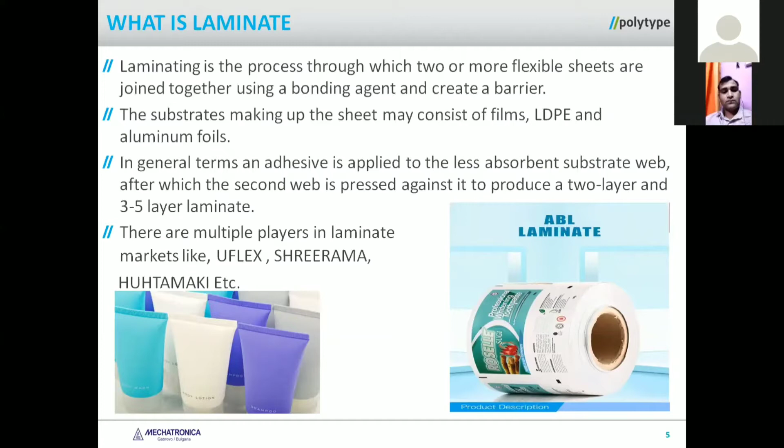As I mentioned, there are two types of laminate. One is ABL laminate, called aluminum barrier laminate, and the second is plastic barrier laminate. The ABL tube is mainly used for pharma, toothpaste, and shaving creams. Aluminum is the best barrier, so it preserves the product from light, oxygen, and moisture. This shows the basic composition of the laminate. ABL tubes give good collapsibility and a durable effect, desirable depending on the product required. ABL tubes are mainly used where barrier is required, like toothpaste, pharmaceutical, and FMCG.

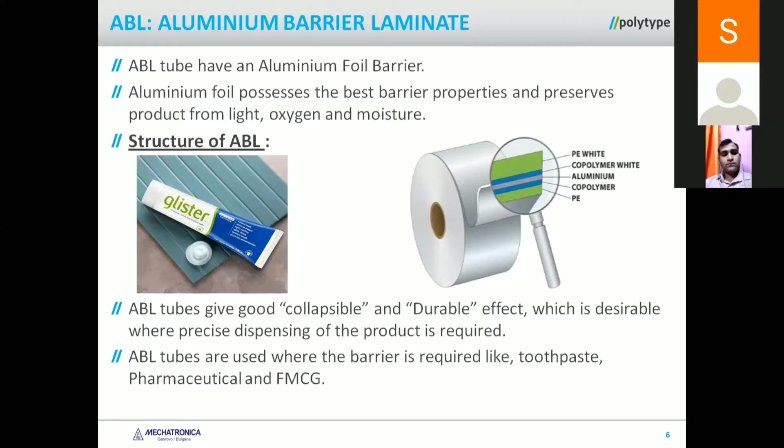The next one is plastic barrier laminate. If you see on this picture, instead of aluminum foil there's EVOH. This is another kind of barrier that gives barrier properties to the plastic laminate. This kind of packaging is more popular in the cosmetic segments like face wash and creams, and it is very environment friendly.

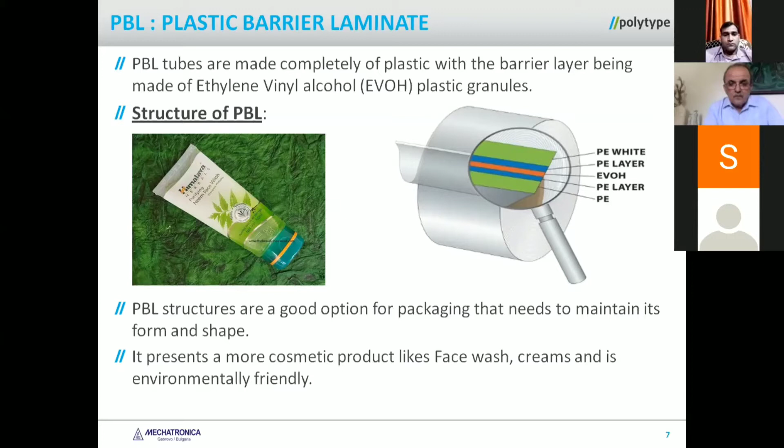Next. If you see this basic process, ultimately this process you're going to see at the end when the video takes you to the factory. But the basic process is: first you have a laminate, then you get the laminate printed, and after printing you make the tube body. There's a shoulder which you make in an injection molding machine, and after the shoulder is fitted to the tube body, then there's a cap which you put on the tube, and then the complete tube is ready, which can be delivered to the customer as is.

The customer fills the tube from the back, because the back side is open, and it will be given to the customers.

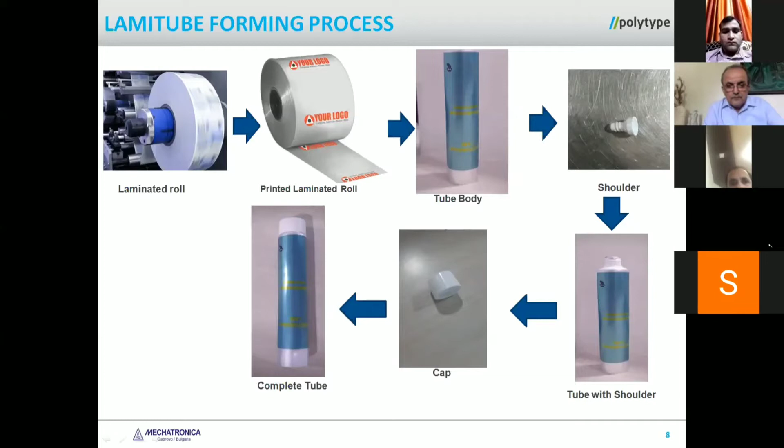Another kind of tube is a plastic tube. The difference is that in a laminated tube, you will always find a seam, there's always a joint on the tube. Whereas the plastic extrusion tube is extruded in a pipe shape from the machine itself, so there's no joint. That is why it's called a plastic extruded tube, the body is formed from the extrusion.

Plastic tubes are also extruded from a monolayer, like there's no barrier in this, or it can be multi-layer, like in a LAMITUBE you have an EVOH barrier. Here also you have the EVOH barrier. Multi-layer options include the 2-layer sleeves and the 5-layer options, and the monolayer and HDPE sleeves.

There are some more technicalities there. When anybody is more interested in knowing about the technicalities, our team is always available to explain that. If you see the structure of the plastic tube, that is also mentioned here: the inner LDPE, the tie resin, the EVOH barrier, the outer LDPE.

Extruded tubes are being used for high-end and low-volume products in industries like cosmetic and food industry. Cosmetic always goes for a good amount of packaging, that's why most people prefer extruded tubes for the cosmetic industry.

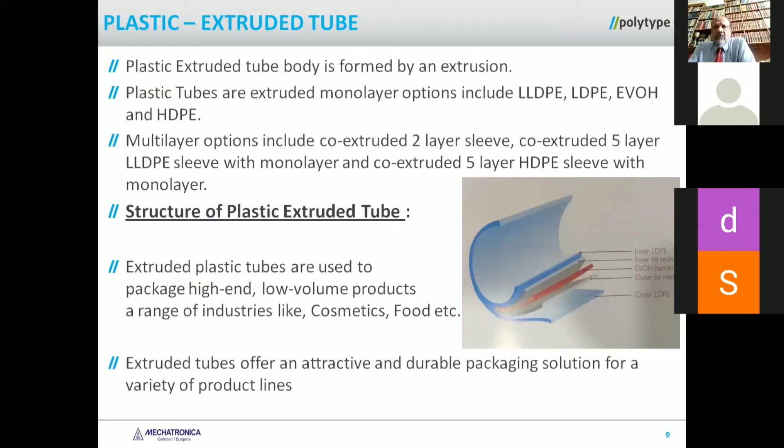So this is the basic idea of the laminated tube and the plastic tube. For the rest, anybody more interested to know about the tube industry and other things, we are always there. Thank you.

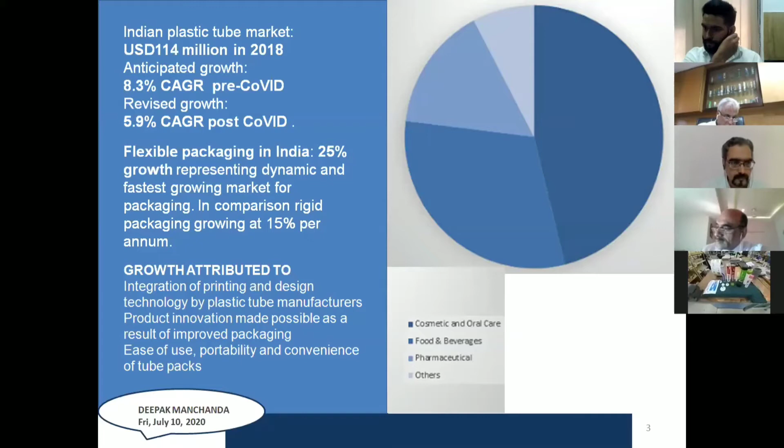So, the choice between rigid containers and collapsible tubes. A lot of people choose rigid containers because they're available in a variety of shapes and sizes, giving brand differentiation in product and packaging design. It's easy to procure in low minimum order quantities, easier to test-launch new products with low initial sales forecasts, and it has easy filling and labeling of bottles and jars. On the other hand, collapsible tubes are available only in cylindrical shapes, but they give you many other advantages, which we'll see in the subsequent slides. Next slide.

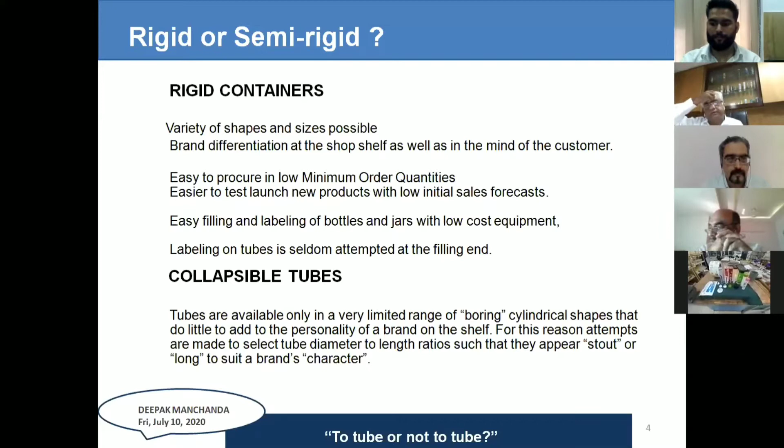Trends worldwide show brand owners moving away from rigid packaging in favor of tubes. Beauty products, personal care, and hair care in particular are fond of using seamless plastic tubes. As the vice president of Essel Propack said, 'We have seen many popular global brands moving from rigid packaging to flexible extruded tube packaging, reaping the benefits of excellent barrier properties, increase in product shelf life, ease of use, and ability of the package to retain smoothness, flexibility, and softness.'

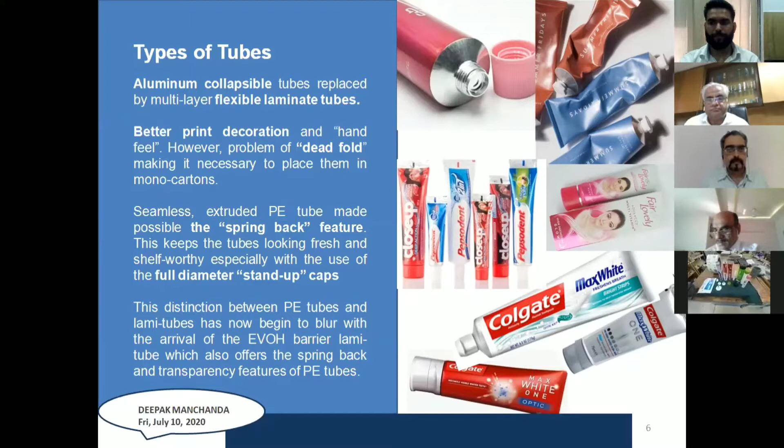How do we differentiate between one brand and one product compared to another? It's really by selection of diameter to length ratios, whatever product capacity we want to pack, whether we want the pack to look thin and long or short and stout. These are the various proportions in diameters and lengths achievable through the dimensioning of the tube. Then of course, surface texture and color are additional features by which differentiation can be added to the tube packaging.

Sometimes transparent tubes are used because you can actually show the product inside, with sparkle effects and glitter effects which you might have seen added in toothpastes. Next slide.

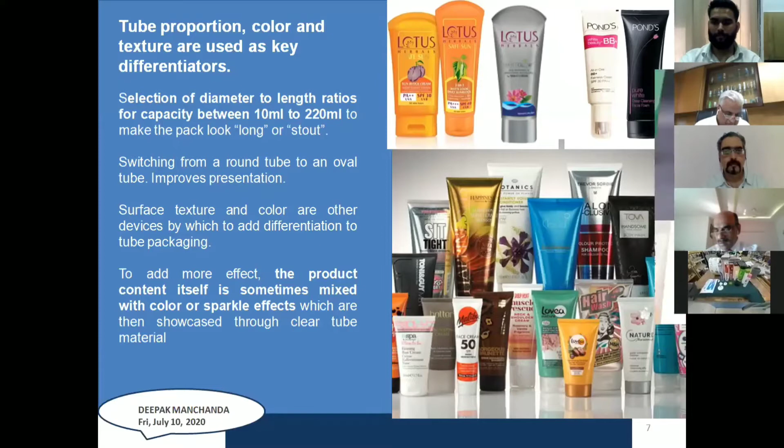The biggest advantage is that tubes, unlike rigid containers, can be sourced from one organized single source supply. This means you can get a tube which has the cap already on it—the cap doesn't have to be separately sourced, and it's pre-torqued, that is properly tightened so there's no chance of product leakage after filling. Direct printed tubes are also an advantage because there's no need for labeling on the tube later. Next slide, please.

The barrier properties and profile seal are an important feature of modern tubes. In order to create shelf differentiation, you can have profile sealing, which you'll see in the yellow tubes on the right side, or the lotus tube, where it's not just a straight line seal at the back but also profiled to give some design and mood to the product. Similarly, you can have barrier layers for better protection for products which don't have many preservatives and are sensitive to the environment. With barrier layers, you can achieve a lot.

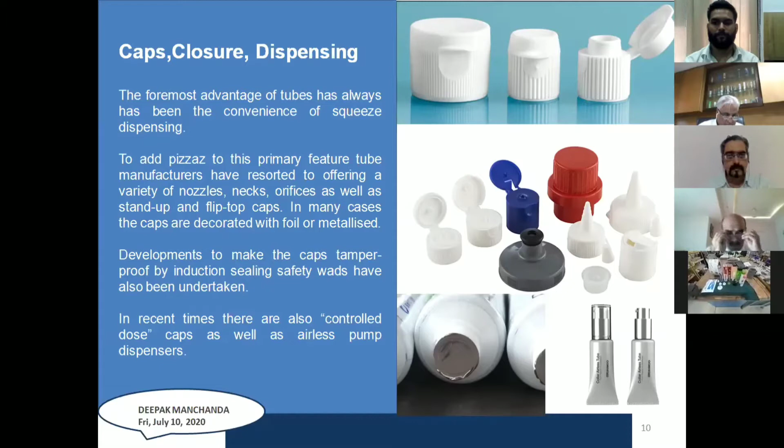Decoration systems have been improving through the years, and today you find tubes decorated with photorealistic print capabilities. A lot of big brands have chosen metallized finishes or foiling. These are all devices to make the tube-packaged product look different from the competitive product. Next.

Modern print decoration techniques can offer so much more creative opportunity. This is what differentiates the tube-packed product from a rigid container with a label on it, which has limited possibility, especially in plastics where the label addition to the rigid pack may be doubtful. Next, please.

One more thing—just go back to the previous slide. We must mention digital printing on tubes, because this is a new emerging technology. Digital printing has become possible to some extent on tubes, and that will be quite a game changer in terms of allowing shorter runs. Next, please.

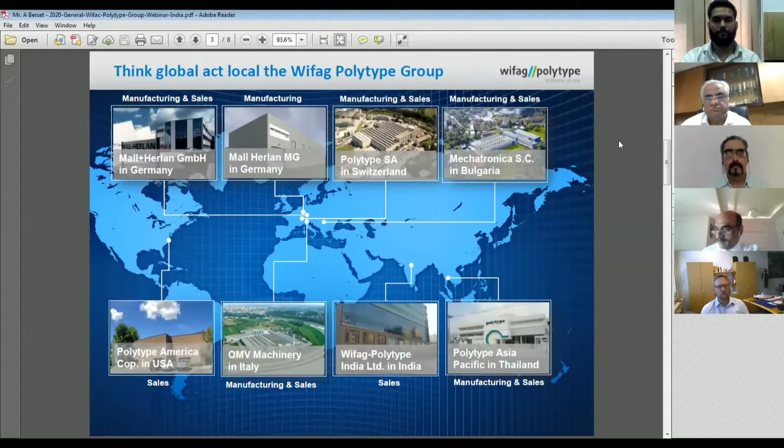Here you see some of the companies we have around the world, as mentioned before. What I'd like to tell you is our philosophy: think global, but act local. This is why we established companies in India, the US, etc.—to be closer to our customers and understand the needs of the market.

Coming back to the two business units, I can show you our competencies and the technology we provide in the group. In the plastic business unit, through OMV, we make extrusion and thermoforming machines. Through Polytype in Switzerland or Thailand, we make printing machines for cups or tubes. We also provide capping machines for tubes, and lastly, laminate machines, provided by our company in Bulgaria, Mechatronica.

In the metal business unit, we have three main products: aluminum tubes as the first one, aerosol cans, and lastly aluminum bottles. The advantage of the metal business unit is that we can provide equipment from extrusion to necking, meaning we can really offer turnkey projects to customers.

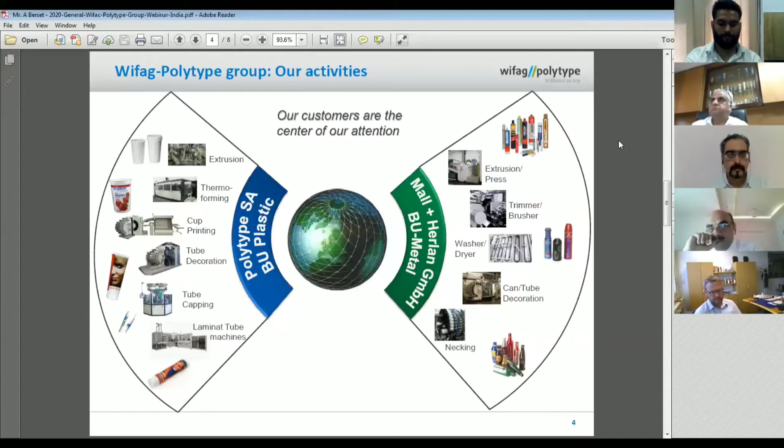As mentioned, I will focus more on the Polytype side here. Polytype has been the printing specialist for more than 60 years now. This is an example of our portfolio for tube printing machines—as you see in this chart, we can provide machines at speeds from 80 tubes per minute up to 300 per minute, and we cover the full range of diameters from 13.5 to 63.5.

As for the decorating technology available on the Polytype portfolio, we started many years ago with dry offset, and over the last 10 years we developed different technologies like flexo, screen printing, hot stamping, and recently we designed a digital printing machine as well.

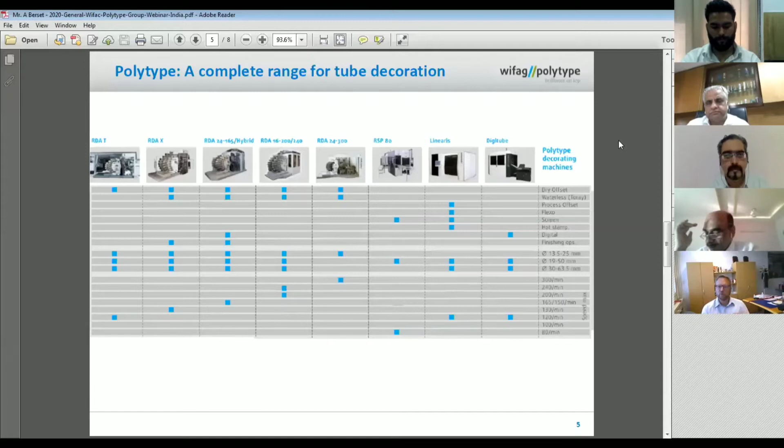As mentioned in the previous slide, we also provide everything related to the cap—capping machines, membrane sealing, etc.—really to provide a finished tube to the potential customer.

So this is more a view of, again, from Europe and North America. It could be slightly different in India or in Asia. But what was the trend in the last 5 years? Of course, like 10 years ago,

plastic tube was only printed by offset and screen. After that, flexo came, and in the last 5 years, we really have a push in the multi-decoration system. Labeling has been reduced every year and really replaced with this multi-decoration process.

Why before it was labeling quite attractive is because this label was printed on flat with different print technology like screen, flexo, hot stamping, etc. But now with the new machines we can provide, we can also produce this print direct, this multi-decoration, on tube.

So this is why we have a big market segment now which uses multi-decoration. And the beauty of today is this can be done on one machine, and not like maybe in the past where you had to go through several machines, and it was quite difficult to make the right logistics and get the right number of tubes you would need at the end.

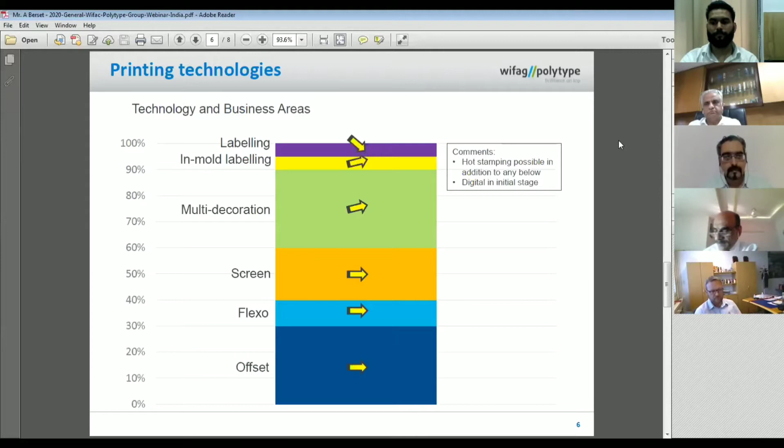Next. So here I want to share with you some data we have about the tube packaging. And it was already shown on the previous presentation, the different markets. So today, what is positive in the tube market? Every type of tube had growth, but at a different rate, of course.

And the second one is the ABL, the aluminum barrier laminate. It's still growth, but here I put a star because especially in some areas in Europe, this packaging is under pressure because of the recycling process. If you have this tube, you have a layer of aluminum and a layer of plastic, so when you take this packaging back, it's more difficult to make a recycling process.

So this is why in some areas or countries we see maybe a decline for this type of packaging, mostly for toothpaste, but that toothpaste will move to PBL or plastic tubes or aluminum tubes. And the last one, aluminum tube, we also see in the last 2-3 years again a growth coming back, because this was very flat in the past, but now we can feel growth again also in this packaging.

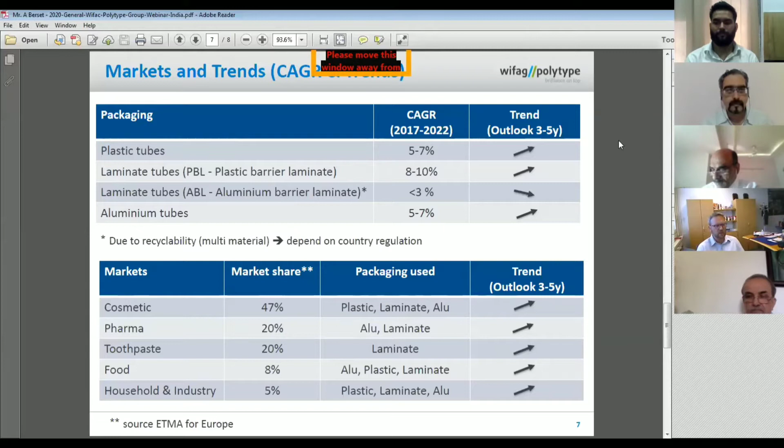We see growth everywhere. We see opportunity everywhere. These are of course numbers for US and Europe, but my message here for you, if you are an Indian manufacturer, is that it also gives you a good chance to make exports to these countries. Thank you.

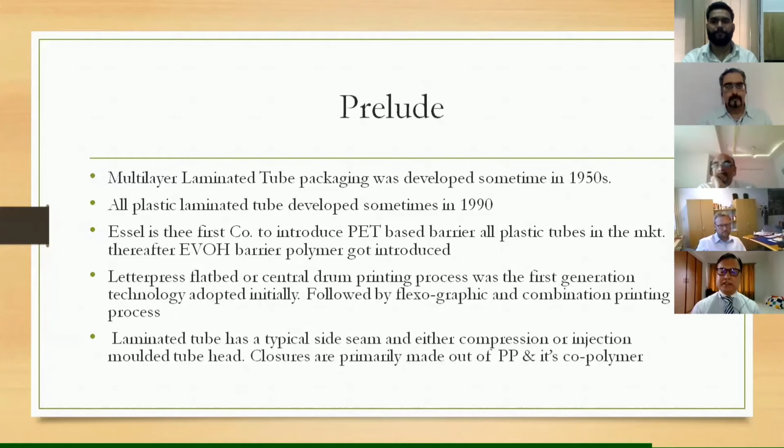Next slide, please. Yeah, this is the overall market, what we understand. These are all from internet research only, because I cannot give too precise a figure, not allowed to give. So around 24 billion tube market on laminated tube. Interestingly, I have not added Neopac here because Neopac is also a very unique tube where they have an aluminum foil base, the basic core. On that, they have an all-polyethylene sheathing like a plastic tube. So side seam is there, but it is buried inside. But on the surface, you can do offset printing also. So those are very unique tubes, and they have very special applications like pharma and high-end cosmetics.

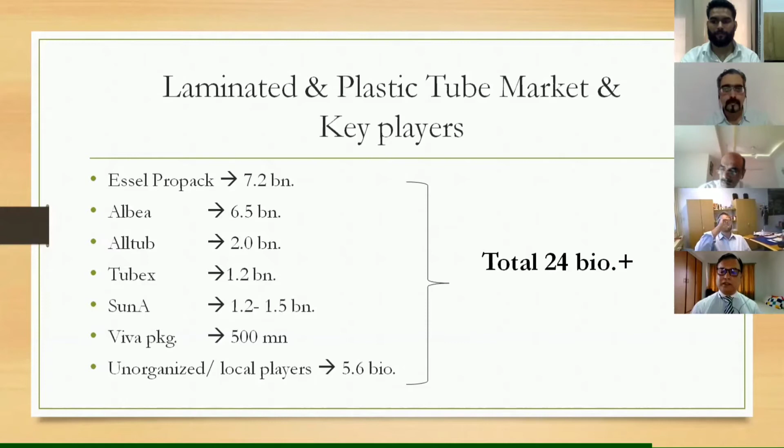Interestingly, those tubes are covered under patent, so you cannot copy those. So though there is huge market demand, because it is covered by intellectual property, people cannot copy those. And these have worldwide coverage there - Neopac, Switzerland. Now, over and above this 24 billion, interestingly Colgate family globally in-house produces around 3 to 3.5 billion tubes, their own captive consumption. So that is not available for any tendering and all these things. In India, of course, Colgate we supply over 1 billion tubes, but in China, in Mexico, in Brazil, Colgate makes their own tube, and the laminate also, they make their own laminate.

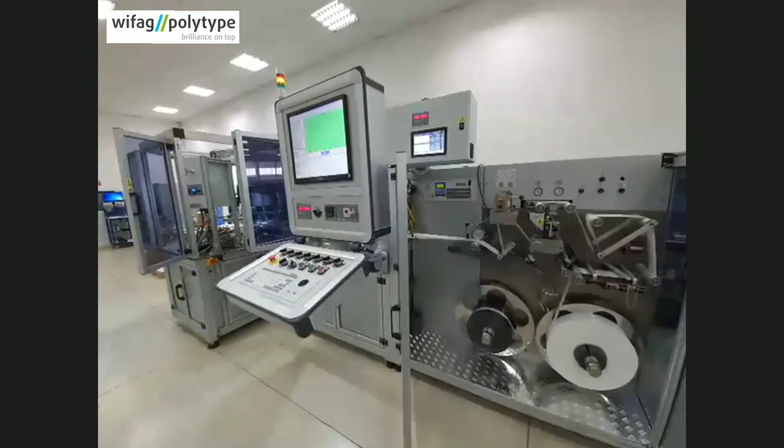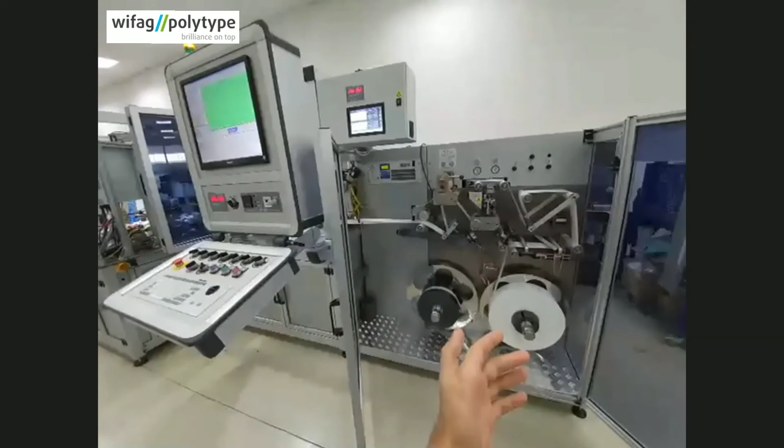Now, this is what the whole machine looks like, the whole complex, and it can roughly be divided into three separate parts. The first part, the unwinding part, where the printed laminate is loaded. Then we have the body making part, which I will go into detail shortly, and the tube making part.

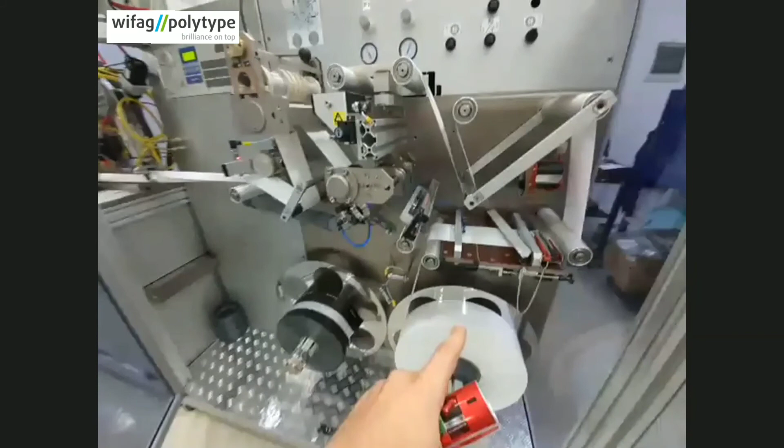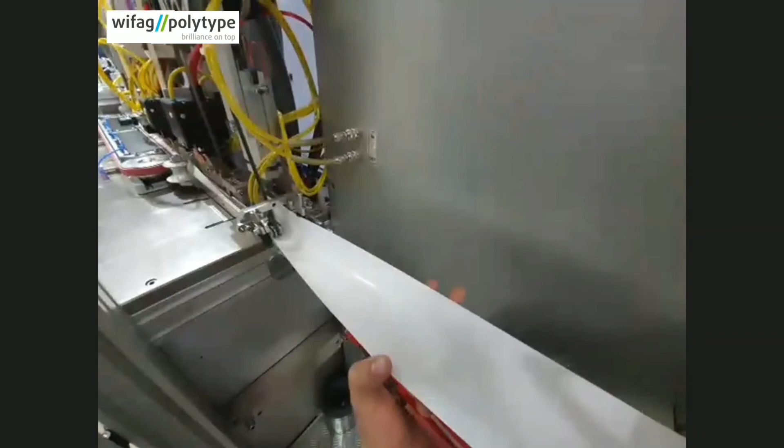So as I said, on the unwinding part, the laminate is being loaded and it looks like a sheet. Through the unwinding part, it is being trimmed and guided to be fed into the body making part. The job of the body making part is to form this sheet-like material into a cylinder and side seam it to make sealing, to make it into a cylinder.

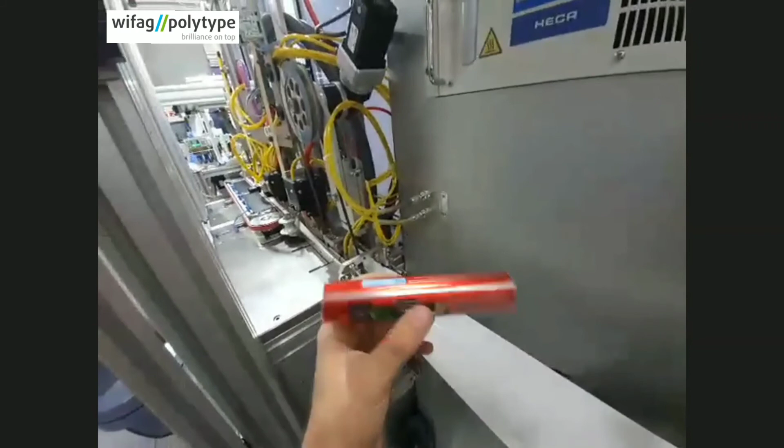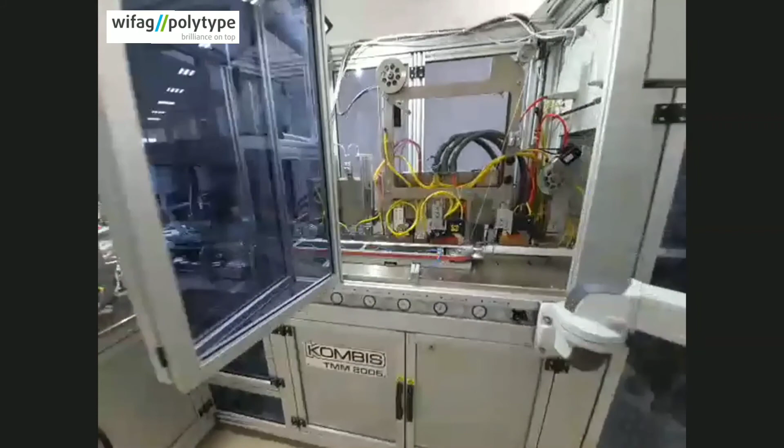Now, as my colleague said, there are two materials used in tube making, ABL and PBL. The machine is capable of running both materials, and there are different technologies to do that, but no matter what technology is used, the end result is the same.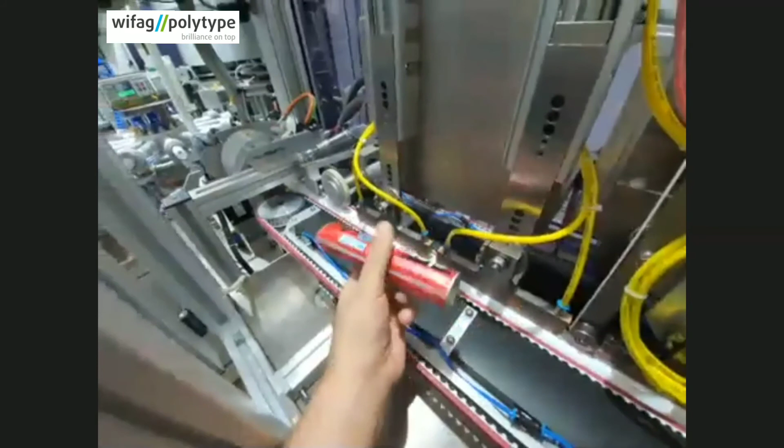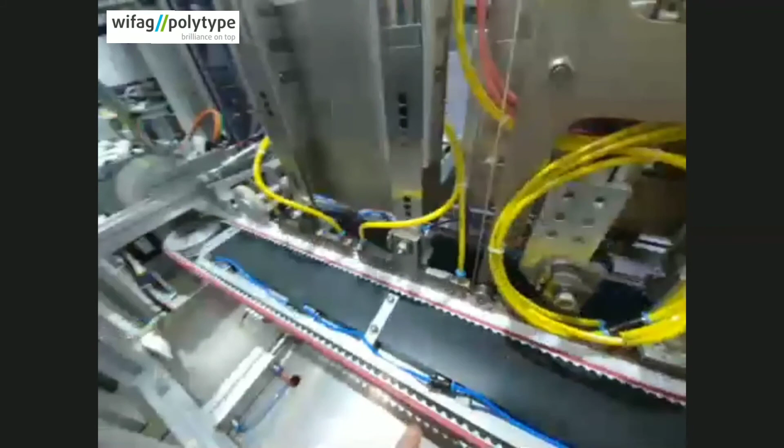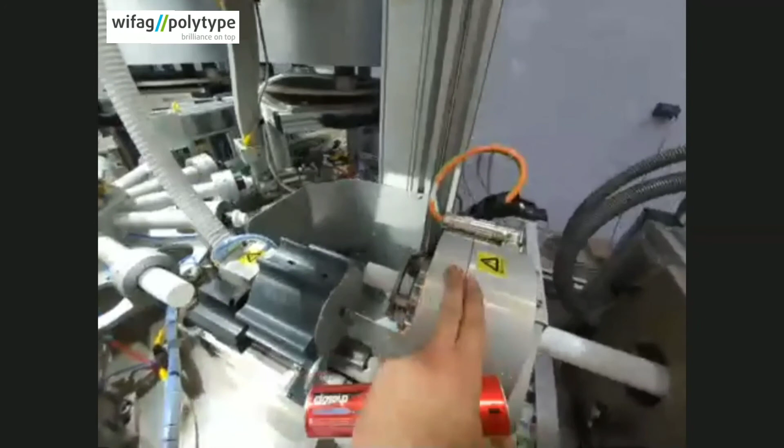On the body making part, we have this very long cylindrical pipe-like laminate, which is then cut into the proper length depending on the design required. Now, what you see installed on the machine is a blank laminate because currently we are testing the machine. But in normal conditions, you will have a printed laminate with a design,

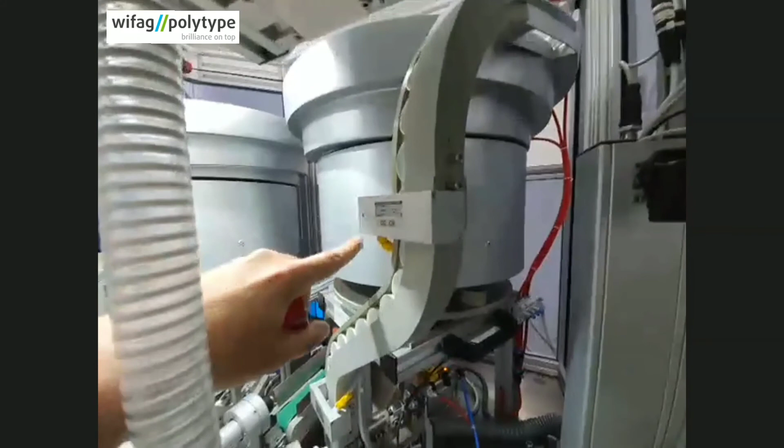which, on the rotary cutter, we will be cutting to the correct length, and it will be transferred to the tube making part of the machine, the last part, which combines all three elements into one thing. The first thing here is the shoulder feeding system, the shoulder station, which loads shoulders onto those mandrels. The second thing we add is the body itself that we have produced on the body maker. After that, we go to the shoulder welding station.

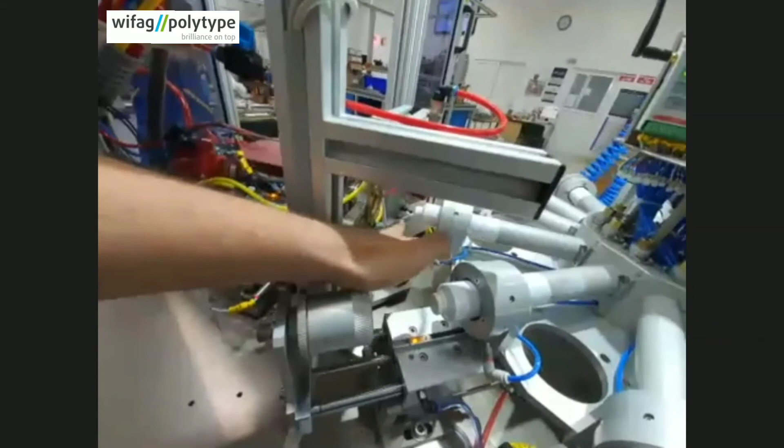Depending on the materials, we have different shoulder welding stations, but here is the place where the shoulder is being welded to the body. Now the machine has the possibility to have a separate module added here, which can add an aluminum membrane to the shoulder if the product inside requires it.

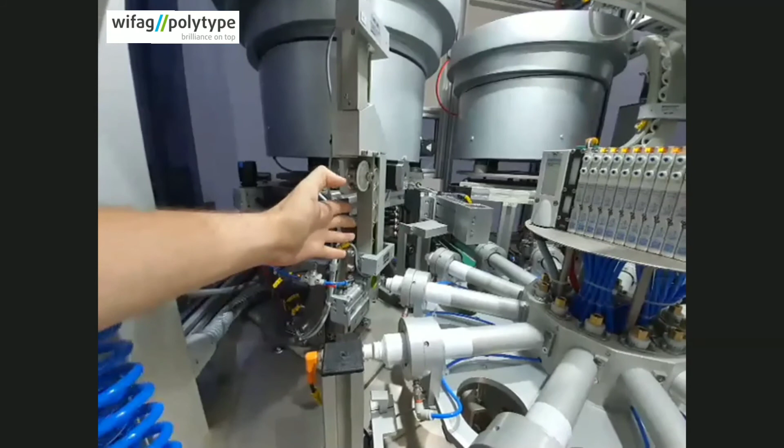The last thing that is added to the tube is the caps. Again here, similar to the shoulder station, we have the capping station, which feeds caps and loads them onto the already welded shoulder. No matter what the cap, the station can mount any cap you can imagine. The only thing you need to change is this module depending on the different types of caps.

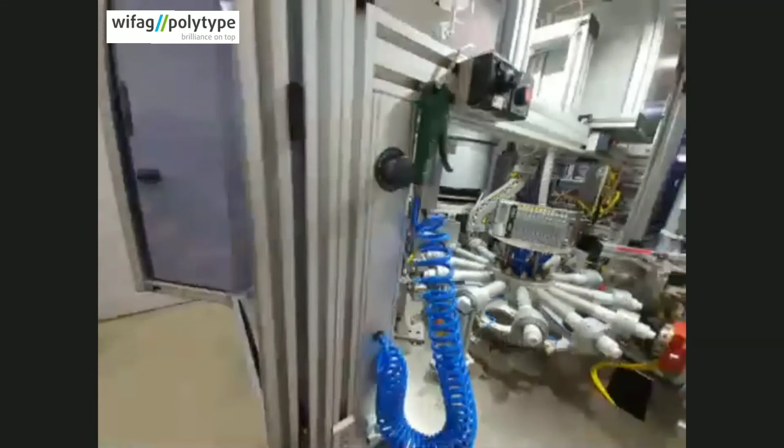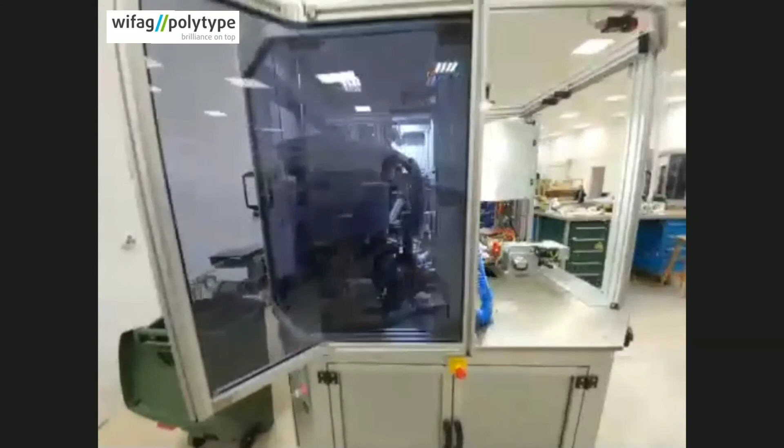Now, after the cap is mounted onto the tube, it exits the machine, and after that the tube is ready to be manipulated on other machines. Now my colleague will help me and start the machine to make a short live demonstration of how it works so that you get a clearer idea of what I have been talking about.

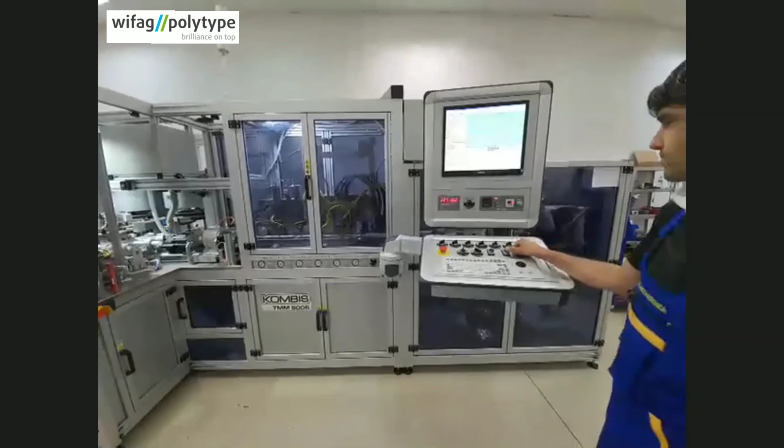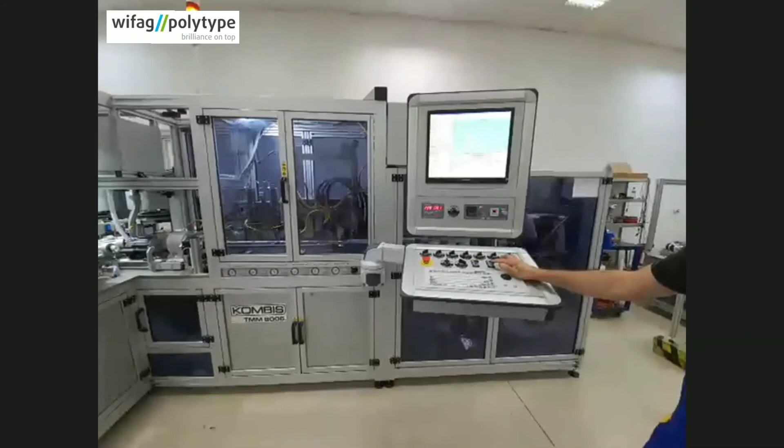What is happening right now is we're waiting for the heater, which makes the shoulder welding, to heat up, because currently the machine is running with PBL plastic material, which requires hot air to weld the shoulder to the body. As soon as the temperature is reached, we are ready to start.

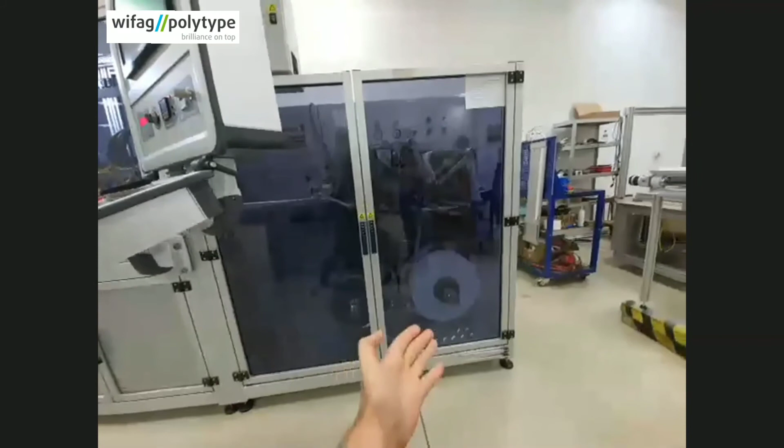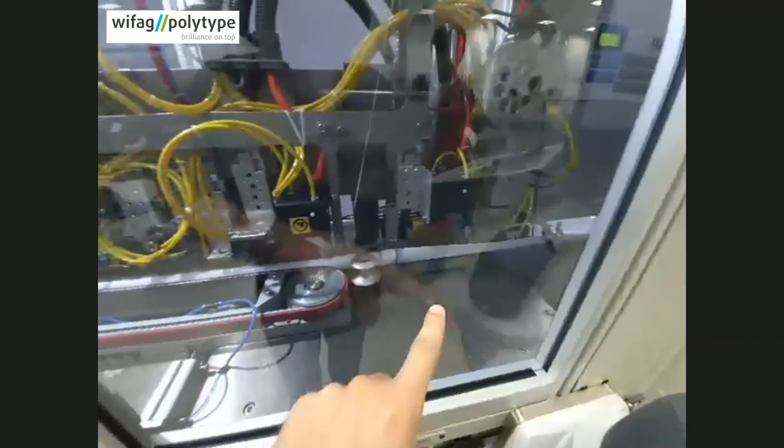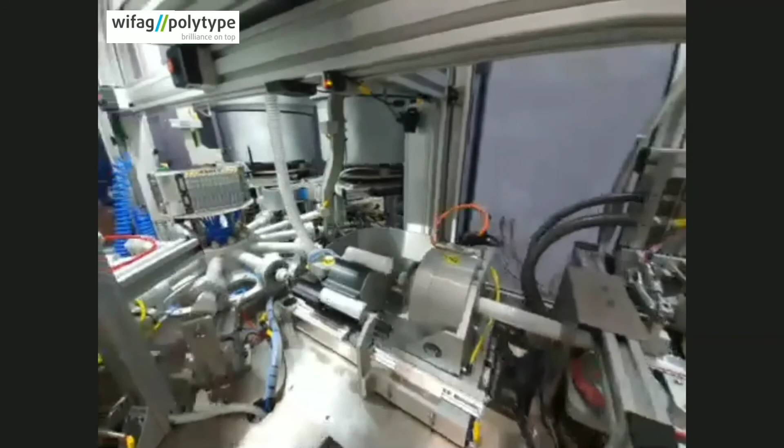As you can see, printed laminate being unwound, printed, then sent to the body maker, where we make the cylinder. We cut it into separate bodies, weld it, and it exits the machine.

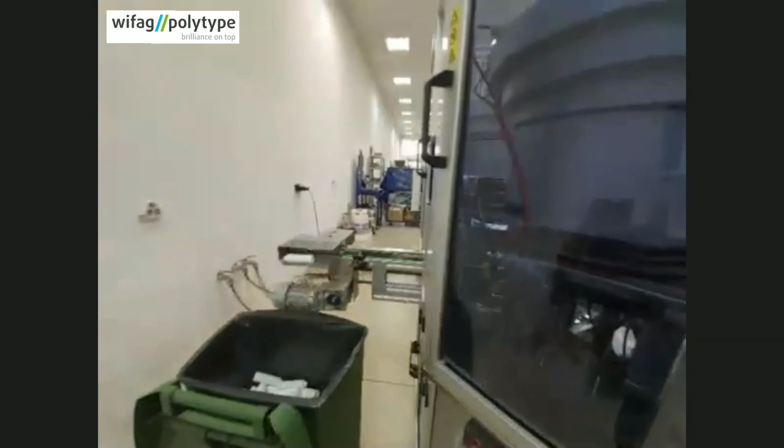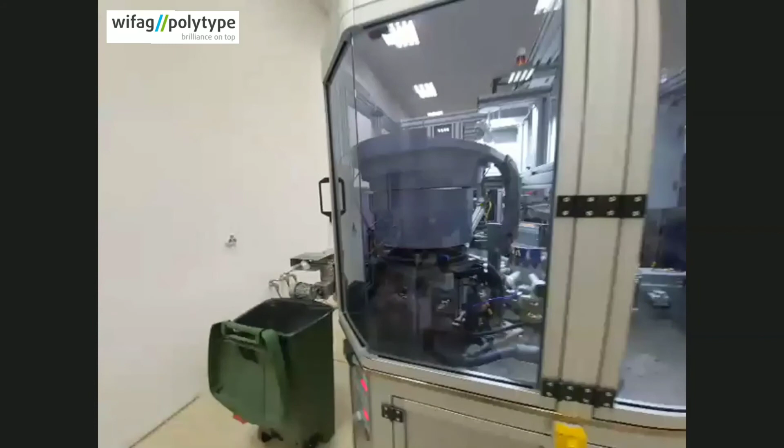I hope that was informative. And thank you.

Thank you, Miru. It was nice to get away from home and visit Bulgaria after 3 months of lockdown.